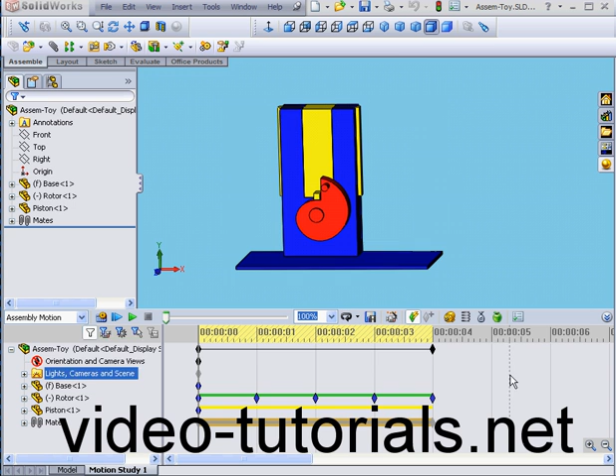Welcome to our tutorial on using angular mates. We're going to pick up where we left off in our previous tutorial with the toy. In this tutorial, I'm going to use angular mates instead of distance mates to rotate the rotor.

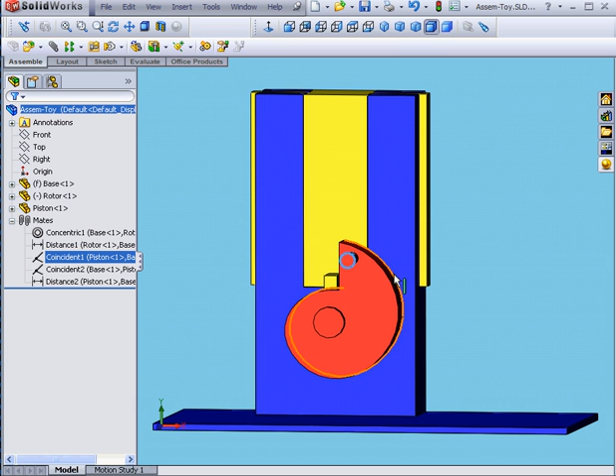Let's exit Motion Study. Go back to our model. Currently, I have two mates for this rotor, coincident and distance. The distance mate is simply an offset between the rotor and this face. I'm going to click Mate. Let's right-click and clear selections.

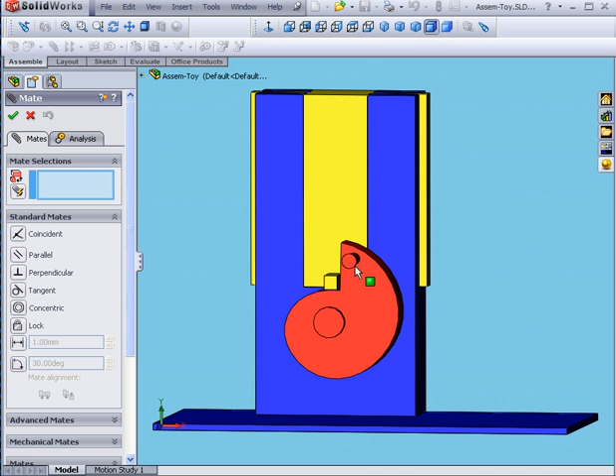I'm going to create this mate in a way so that the initial rotor position is 0 degrees. And then it'll move to 90, 180, 270, and 360. It's easy to do this way, and it's less confusing for SolidWorks too. I'm going to select this face, and then this face. Now we select Angular Mates, enter the value at 0 degrees,

Tab, OK. Next, I need to check the angle calculation clockwise. Basically, I increase the angle value, and the rotor moves in a clockwise direction. If that's not the case, simply check Flip Dimension. Let's go back and enter a value of 0, Tab. At this point, I'm ready to click OK, and OK.

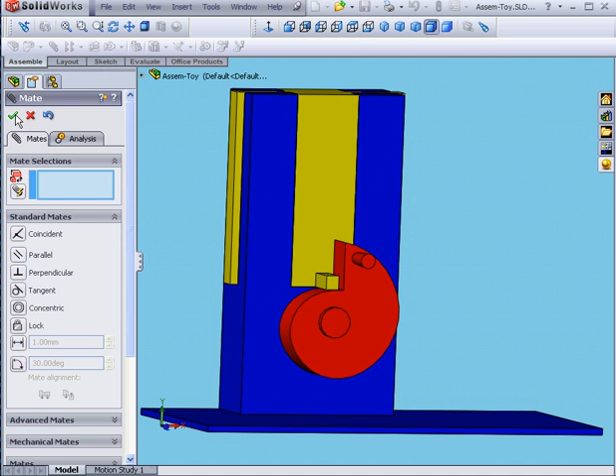Let's return to the Motion Study tab. SolidWorks asks me if I want to update the time 0 keys back to valid positions. Let's click Yes. Previously, the key was red. Now it's blue. Let's highlight our key points and delete them. Next, expand the Mates branch. Here's my angular mate.

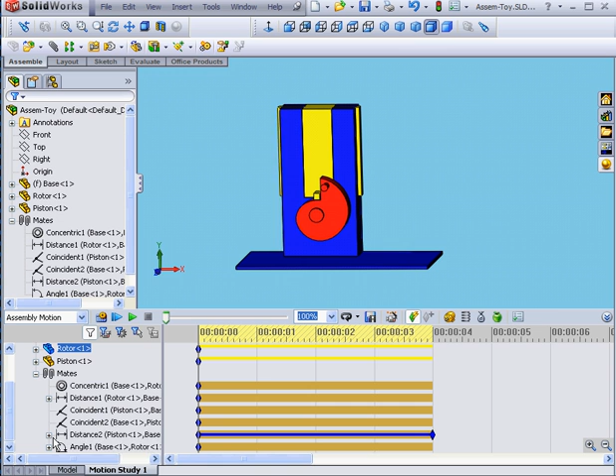Let's bring the time bar to the 1 second mark. Double-click on our angular mate. Let's move the slider to 90 degrees. OK. Let's drag our time bar to the 2 second mark. Double-click on our angular mate. Move the slider to 180. OK.

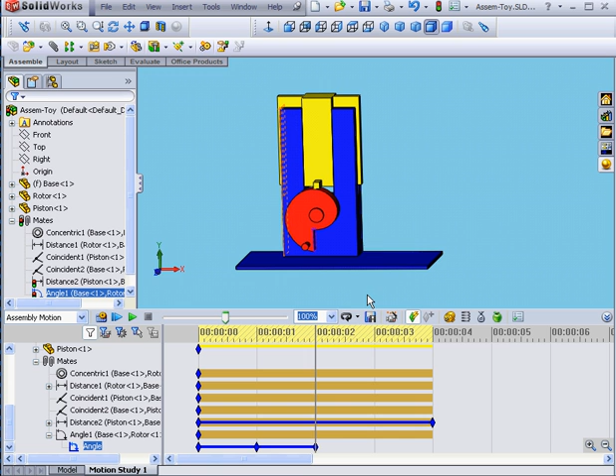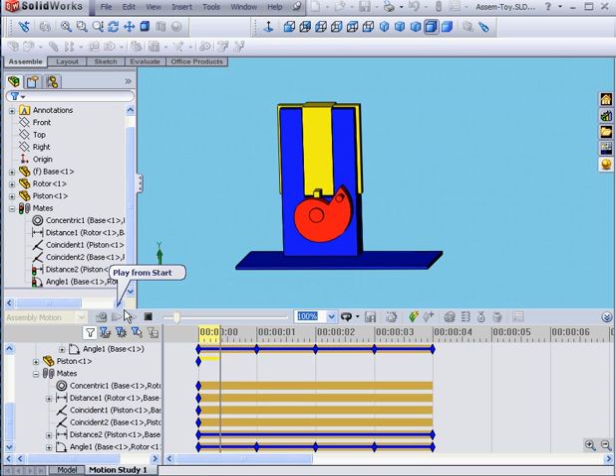Now let's move the time bar to second 3. Double-click on our angular mate. Slide up to 270 and click OK. Our last move is at the 4 second mark. We double-click and move the slider to 360. Let's click OK. Now let's calculate. Here is our preview. Everything seems fine. Let's press Stop.

In a situation like this, it's important to watch for this particular problem. Let me double-click. 360, as you see, is actually equal to 0 degrees. But if I put in 0 and click OK, let's recalculate to see what happens. Let's press Stop. You can see that the rotor doesn't move consistently in one direction.

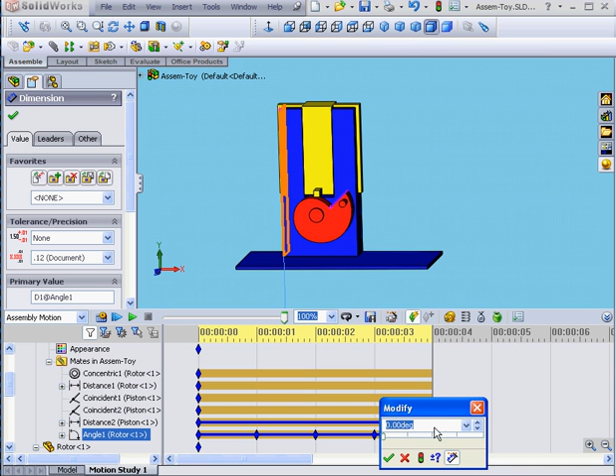Let's return the value to 360 degrees. Double-click. Move our slider up to 360 and click OK. Now let's run our calculation. Each time you make changes, you need to make sure you run the calculation. Now everything appears to run fine. Let's click Stop.

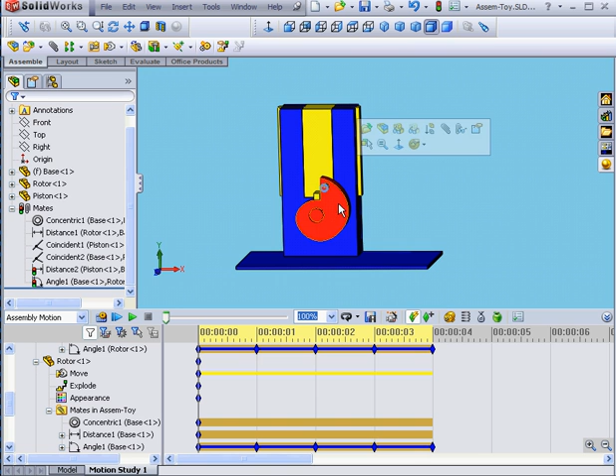For the initial position, if I'd used this face, for example, it would have made the initial angle 90 degrees. I'd need to have calculated starting from 90 degrees, then 180 here, 270 here, 360 here, and back to 90. Unfortunately, this probably would have confused SolidWorks, and we would have ended up with some similar inconsistency in our animation that we just saw when I changed the value from 360 to 0 degrees. You need to watch for these types of issues when using angular mates.

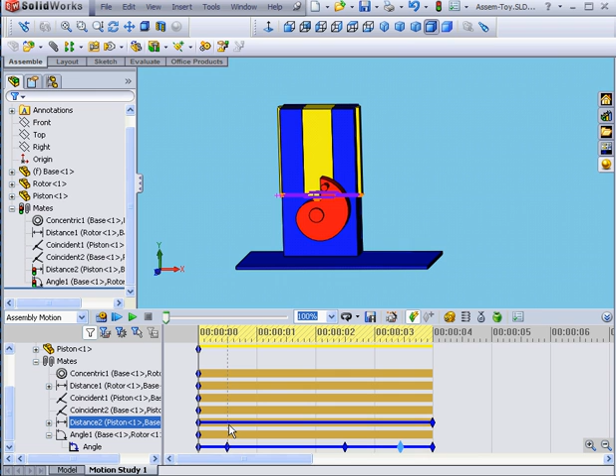In a situation like this, I could have simply used 2 key points at 0 and then 360 degrees and no intermediate points at all, but they are useful, for example, if I want the rotor to move at, let's say, different speeds. Of course, in order to match the piston movements, I need extra key points in the distance mates change bar. I'm going to skip this for now and click Calculate.

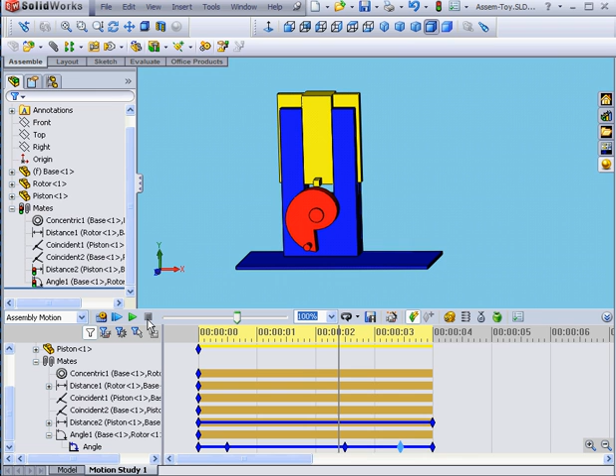You see now that the rotor moves slowly, and then it speeds up. However, the movement of the piston doesn't match the movement of the rotor right now. Let's click Stop, and this concludes our tutorial on using angular mates.